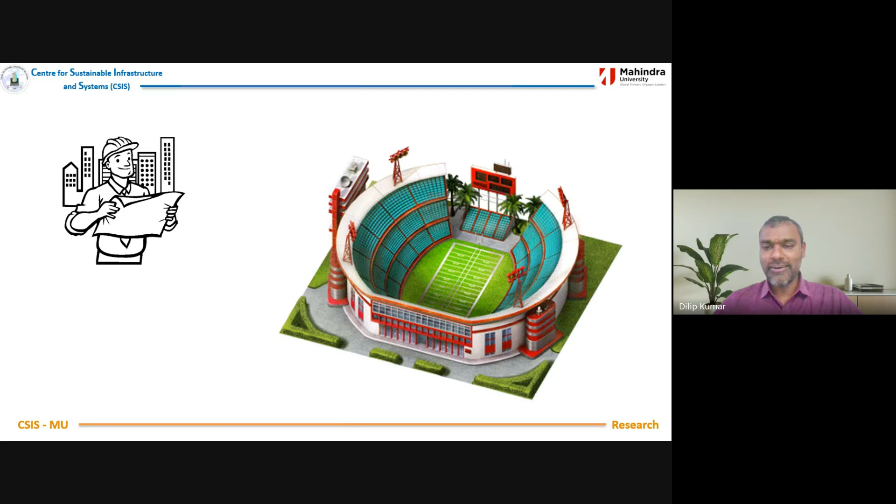As a teacher, I always tell the basic education - what did we learn in civil engineering? We all have dreams to become a great civil engineer, or any engineer, and to be part of iconic or very large structures from foundation to completion of the project in a sustainable way. What we did learn during our education is planning, analysis, design, and construction or execution. This is what we all have learned in engineering colleges in India or abroad, and we've been doing very good. There might be some problems, but yes, this is what we were all taught.

But when we see certain kinds of scenarios like this, how do we answer? Without any basic understanding, how do we address problems like this? How much is it affected or damaged? By what quantity has it been damaged, or what is the amount by which load carrying capacity is reduced? How do we understand such structures is something which was largely missing in the last decade.

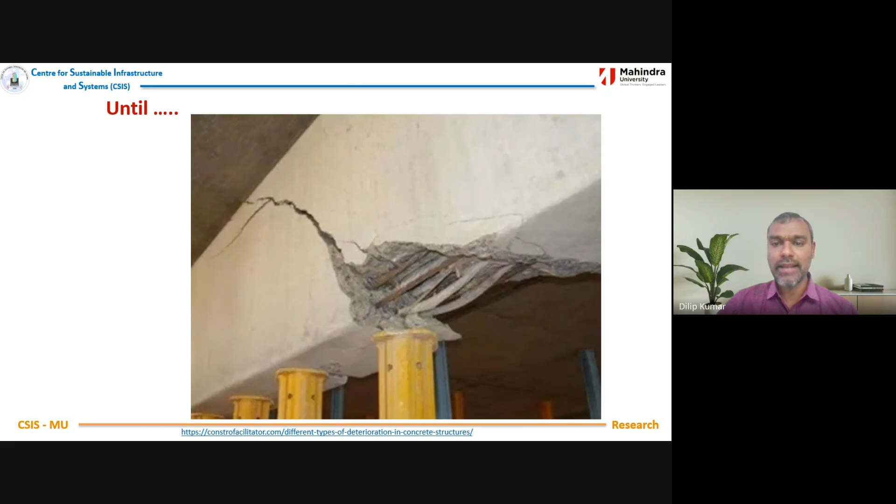So what was missing is trying to be filled by today's education. Civil engineering is not only about building, but also about civilization and maintenance. Currently, as structures are aging, we need doctors. So we have stepped into those shoes where we would like to assess, feel, and understand the structure.

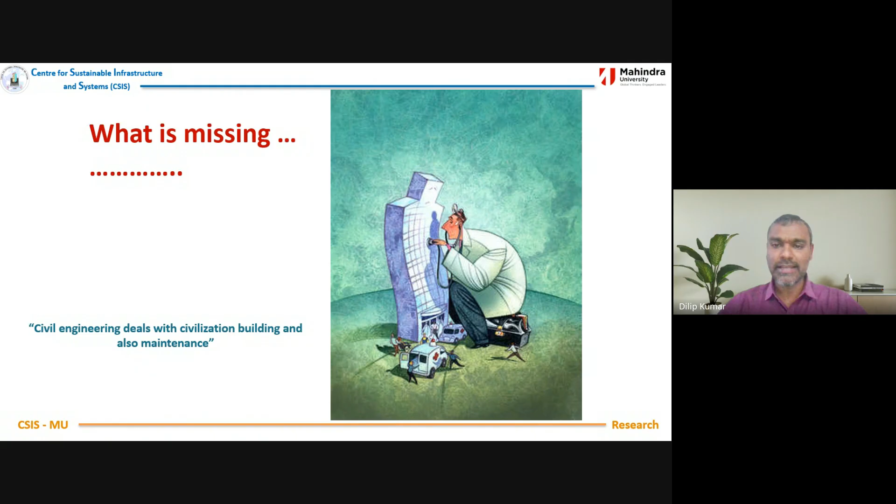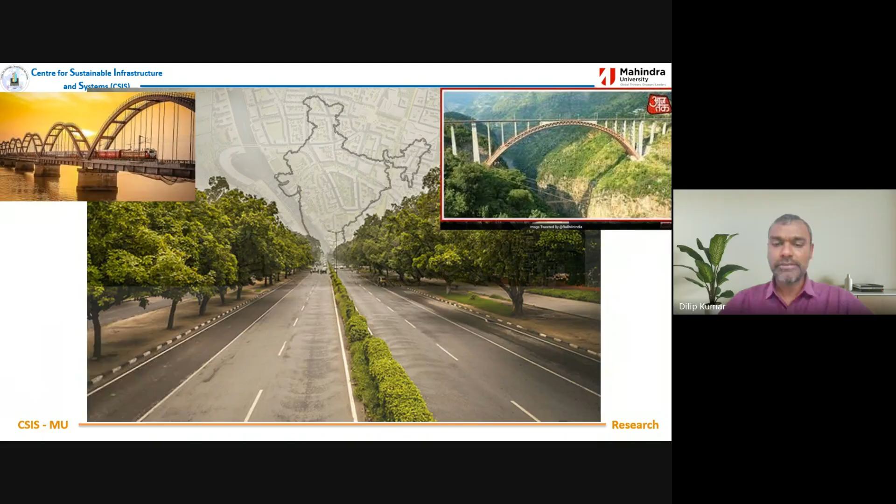The introduction part, as bridges, Indian government has been building a lot of iconic structures, including the recent Chenab bridge as well. And we have very high altitudes, different temperatures, long span bridges. A lot of bridges have been built in India. Not only bridges, but also infrastructure as in buildings as well. Government is trying to invest lakhs of crores on building infrastructure, because that is one of the dimensions to tell a country is developed.

While infrastructure is being built, there are a lot of challenges. One is its aging, and also the condition, and also the quality of construction, how this has been built or constructed over the years. When we come back, this is one of the bridges which collapsed in West Bengal under construction.

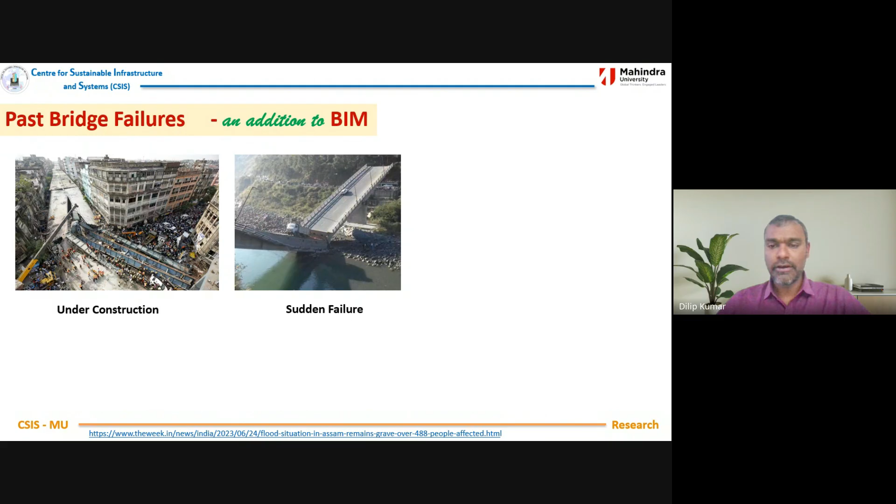It was during construction and it failed, one of the major fatal incidents. The second one is in Himachal Pradesh, where the bridge suddenly failed after 15 years of construction. And third, this is almost 99 years old and was tested by civil engineers, who certified that the current traffic could be allowed. After giving certification, this was washed away by floods, because engineers, when they tested, checked for the live and dead loads, but not for the flood loads.

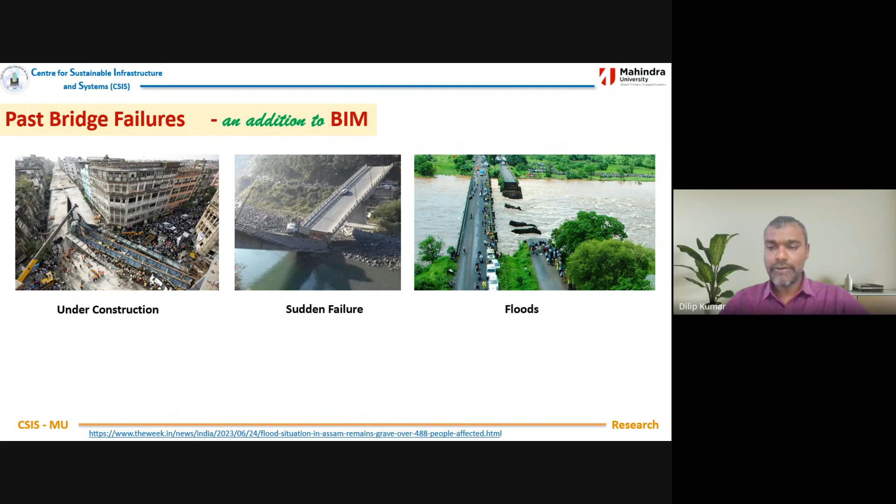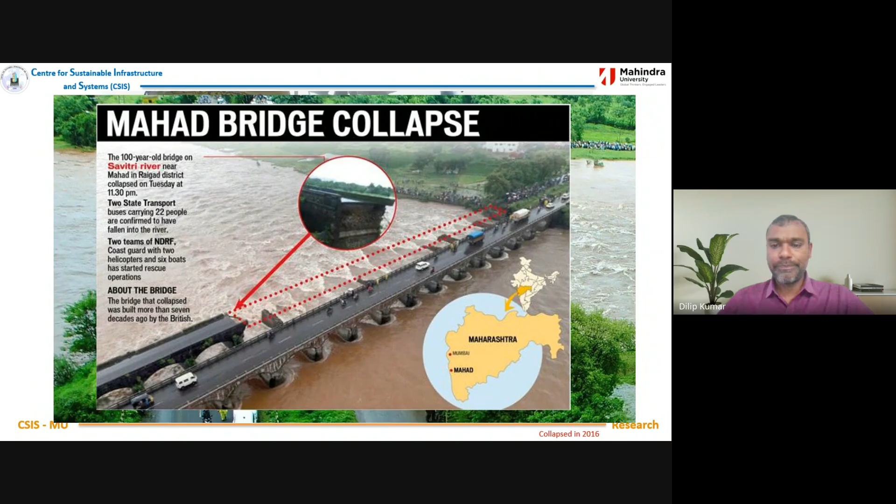Similarly, there are multiple other kinds of accidents happening during construction. And this is Mahad, as I said, lost 30 people during that demolition collapse of the bridge, which was washed away due to flood. And this is in 2023.

This is in 2023 when there was a flood in the eastern part of the country. Almost hundreds of minor culvert bridges have actually washed away. We visited very recently and could still see the effect of washed away roads and bridges still existing in that part of the country. You can actually see the link, and you will find more reasons or more details of the kinds of structures and roads which have got washed away.

So bridges have been one of the most important structures, as they are very costly. In every part, nook and corner of the country, they become vital for any country's travel or even export and import. Now, CRRI, Central Road Research Institute, have taken up a special study to understand the average age of failure of these bridges. From the year 1977 to 2017, they found that 2,130 bridges have failed, and the average age of bridge failure was found to be 34.5 years.

We all know, as designers and engineers, that all bridges are generally designed for 100 years. But then failing at 34 or 35 years means we are losing 65% of its designed age, which was one of the most surprising statistics even for the Indian government.

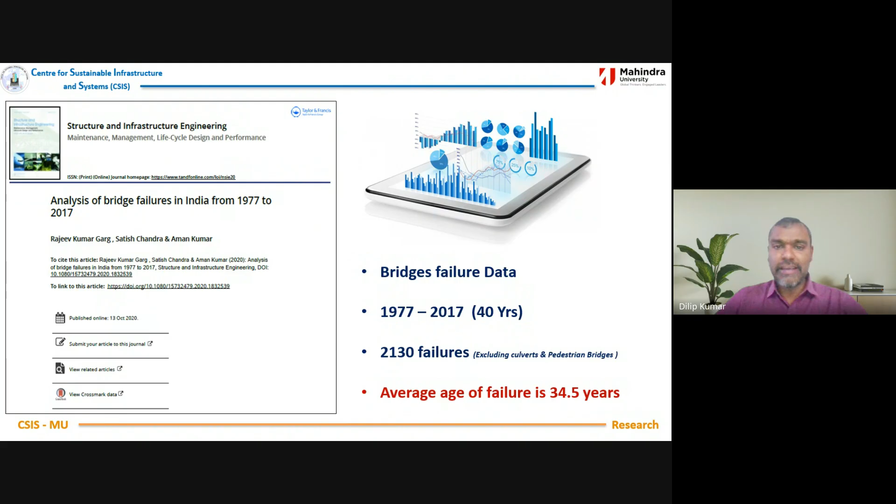So of course, we know bridges cannot last forever, as they are subjected to different kinds of loads, and aging is a natural process, and degradation would happen, either man-made or nature-made. There are a lot of parameters affecting the age of the bridge. But if they are constructed for 100 years, how can we stop any sudden kind of damage, or how do we rank this? It's not only in India.

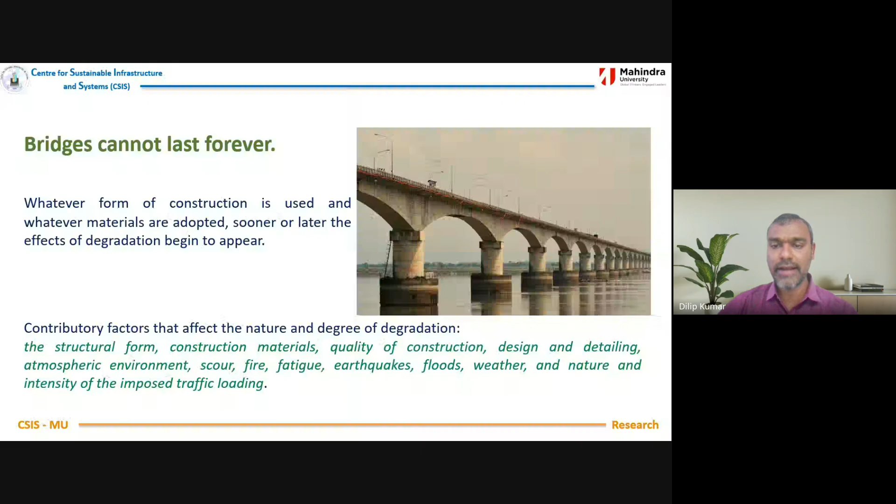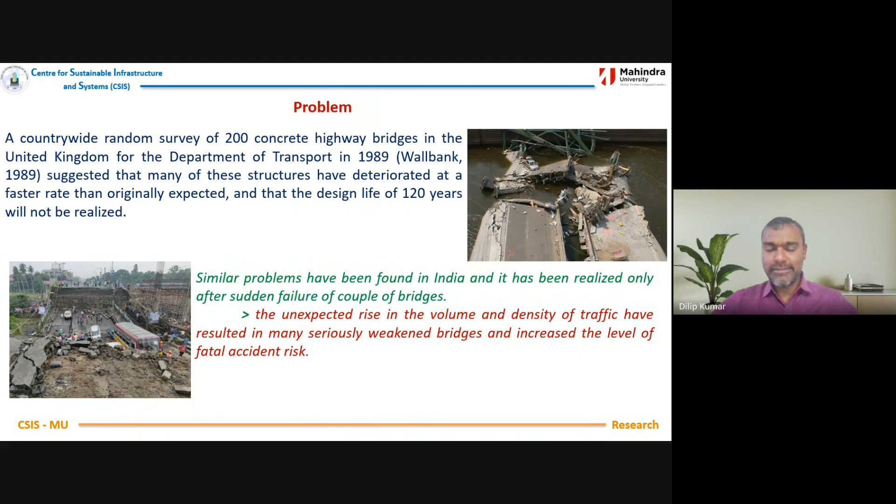UK has also conducted several random surveys on bridges, which are designed for 120 years. Even they have found that their bridges are collapsing much ahead of the design life. It's not only in India and UK, but US, Russia, China, and other countries in Asia and Europe have also found similar kinds of problems. But in India, the average age is found to be very less compared to all other countries. Now, there is one case study which was done in multiple countries. The study was very simple.

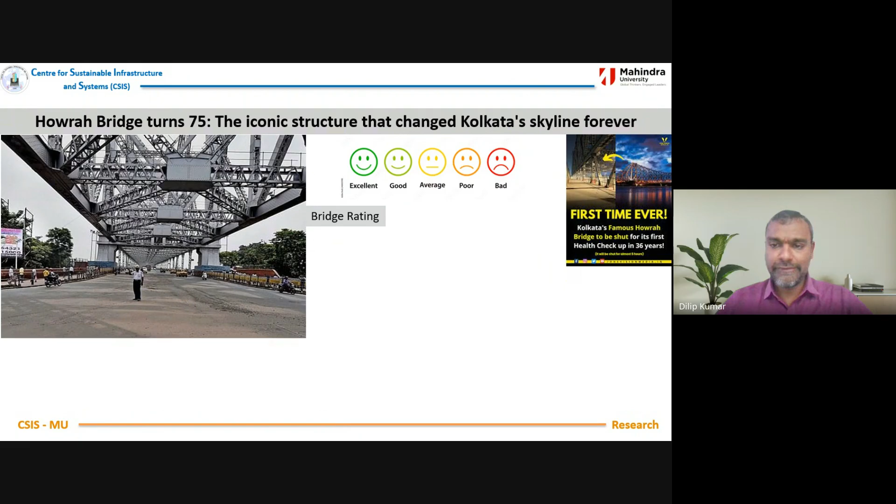A bridge was given to 10 different famous engineers of the country, and they were asked to rate it. All 10 engineers gave different ratings: one said it is good, another said there might be some problem, another said it needs minor repair, and another said there was total fault with the bridge.

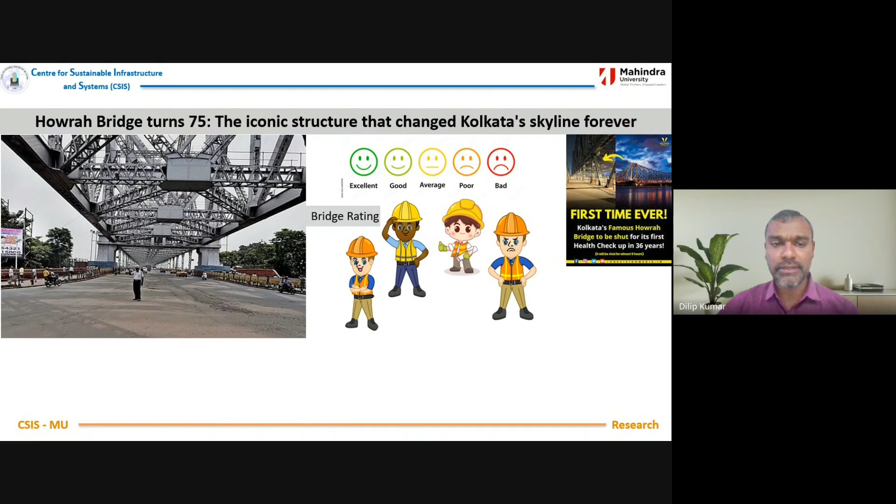So the question, even for the Indian government, was how did it so happen that the same bridge had 10 different readings by different engineers? When inspection is subjective, it depends on the experience of the person, their understanding of bridges and materials. So the same bridge tells different stories to different engineers, resulting in one bridge having a different, non-uniform rating.

So this was also one of our motivations: how can we rate the bridge based on visual inspection, and can we make it uniform? This is one of our first objectives.

As has been known, the Indian government started something called the Indian Bridge Management System, which is about trying to have all the data about all the bridges in India on one platform - regular inspection, assessment, repair, what kind of bridge, what kind of material, what is the span, every detail. It's like giving an Aadhaar card to every bridge in India.

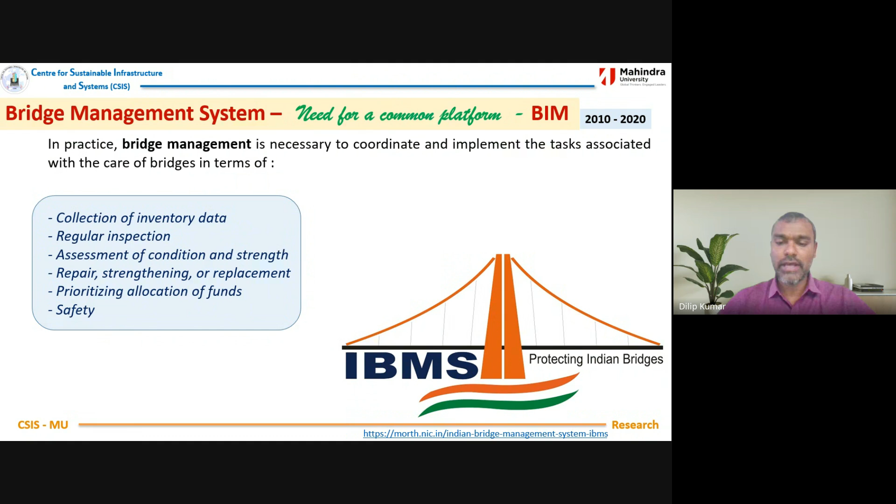This was done between 2010 and 2020, and you can find the statistics on the MORTH or Indian Railways website. Approximately till today, 1.92 lakh bridges have been inventorized, and all this data has been kept in that Indian Bridge Management System.

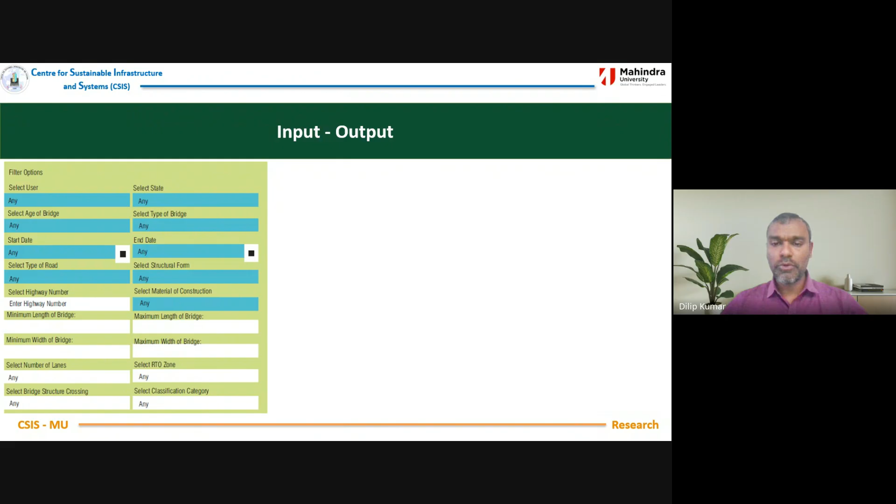But what is the main objective of the Indian Bridge Management System? After having all this data online, they wanted to see the statistics - which bridges have to be repaired immediately, which have to be stopped immediately, and so on. But since the inspection of these bridges took from 2010 to 2020, that's almost a 10-year span, a decade of updating.

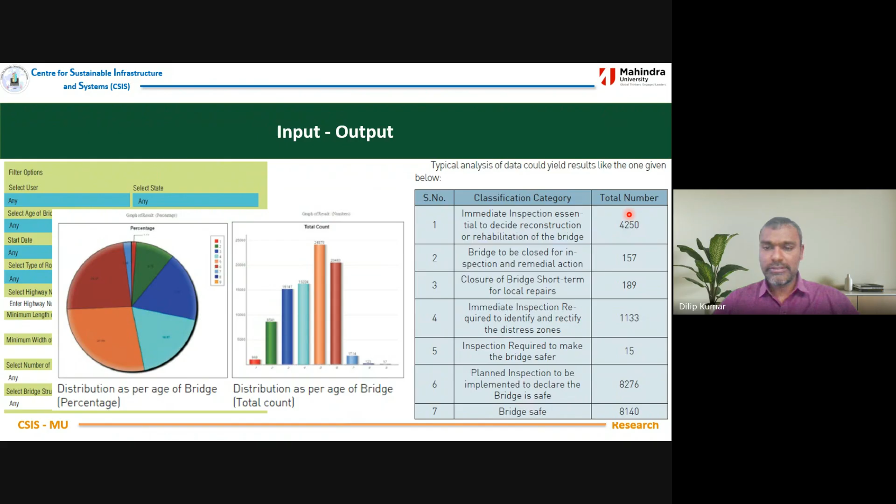Once this was done, you can see all this data about bridges - immediate inspection essential to decide reconstruction, like 4,000 bridges. But this software built on this was not trying to get all the information about all the bridges, as the information updated on this server was not uniform.

The second thing is, how do we update the data automatically? Every 3 or 4 years, having people go into every bridge and update that data would be very challenging. So one of the challenges was data and upload - how do we do that? That was also challenging.

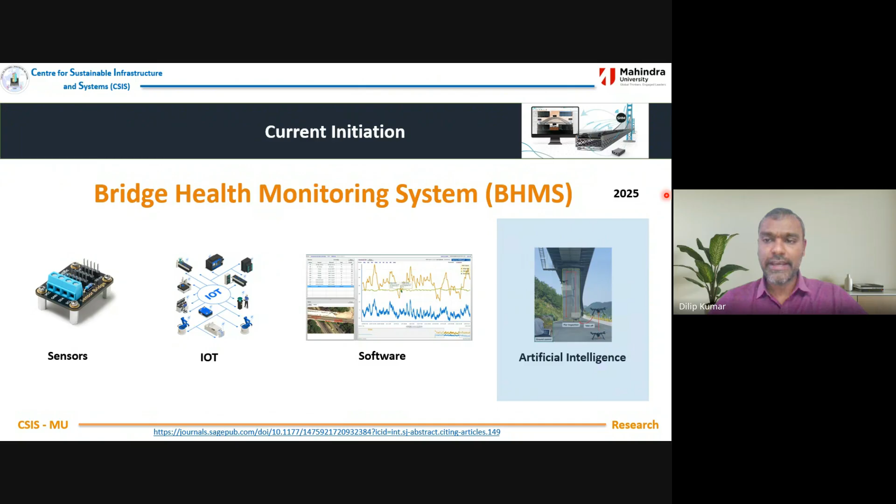Now the Indian government has come up with a new thing called the Bridge Health Monitoring System, BHMS, where they are trying to infuse sensors, IoT, and artificial intelligence. This presentation would like to focus more on AI, especially the assessment of bridges based only on visual inspection, even though we have done a lot of other work based on sensors and IoT, and we've come up with our own code where we analyze even vibration data. But this presentation is limited to implementation of AI.

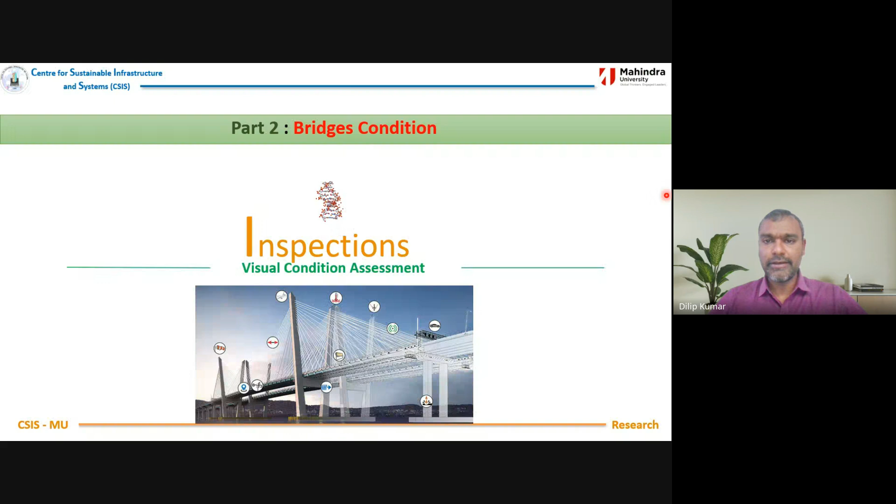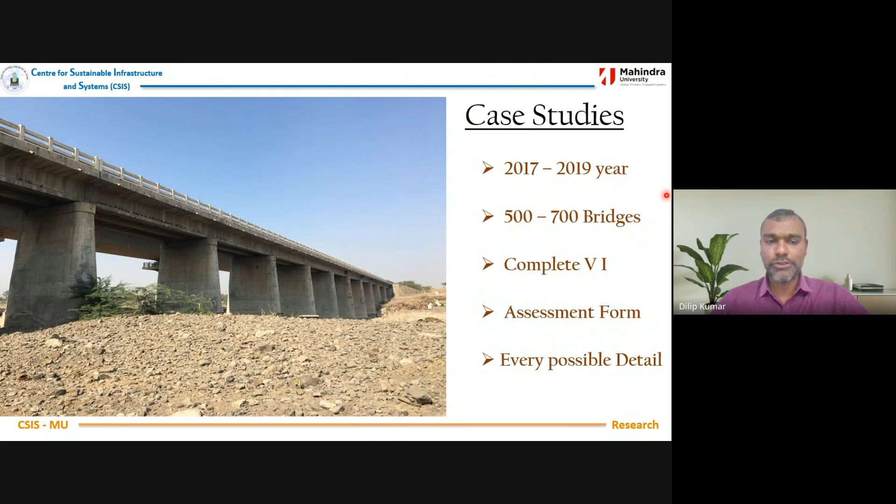These are a few images from sites we visited during our inspections between 2015 and 17. Some of these images were very surprising to us, with more deteriorated bridges than expected. But again, the challenge is how do we rate them? You can see non-structural elements, scouring problems, a lot of spalling and corrosion problems, and masonry and concrete bridges - a lot of different mixed material bridges were also there.

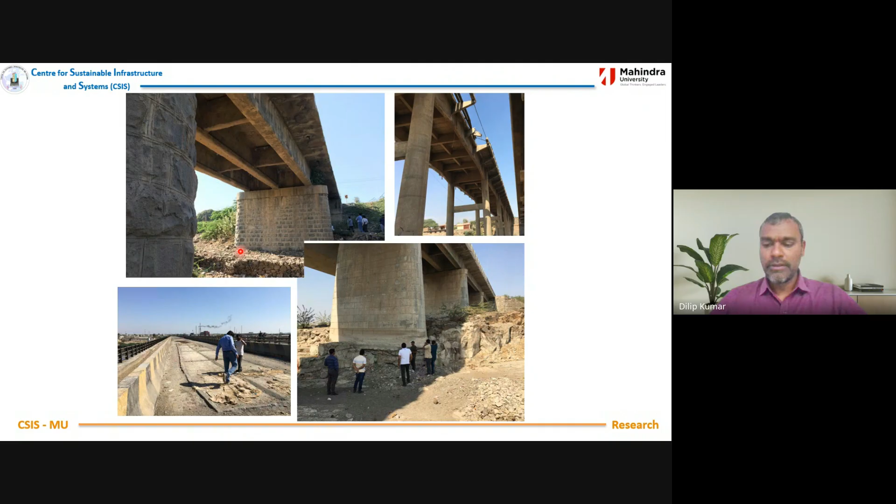And you can see the spalling, and you can see the condition as well. And there were some foundations which were actually built on clay, and they were also sliding on it. Expansion joints were another part of these inspections.

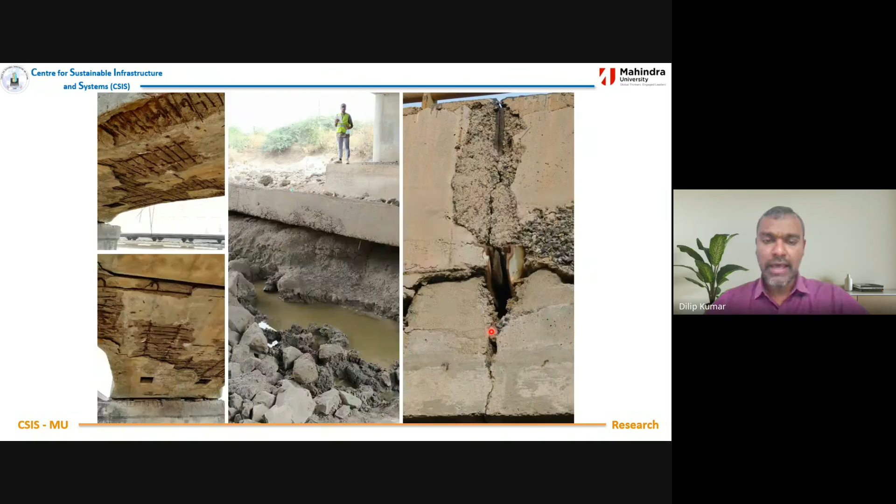But for this, we have to take very good DSLR cameras, zoom in, zoom out, and then sometimes we had to get into the water, mud, everything. We had our own challenges.

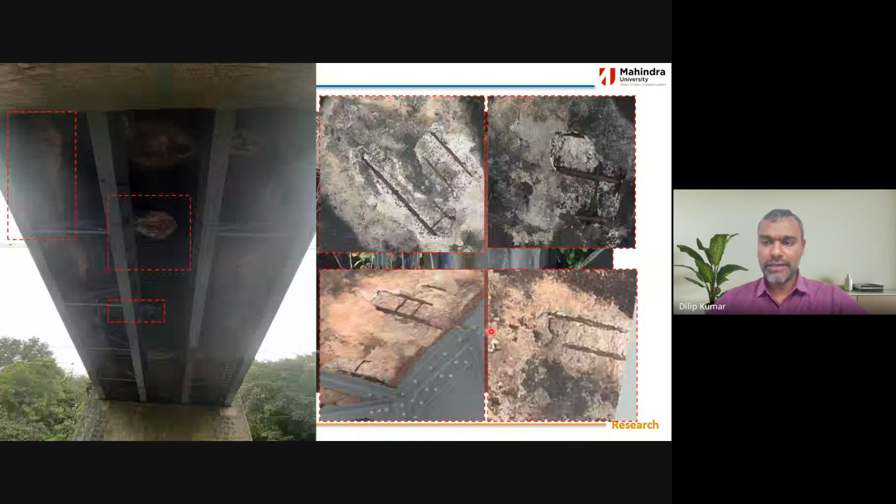And these were other railway bridges, one or two, just for the images to show. And then we had to take ladders, get onto the top and onto the plate girder. We have to take images and see the corrosion. We have to take the hammer and hit the rods, and we've seen it completely corroded on this one.

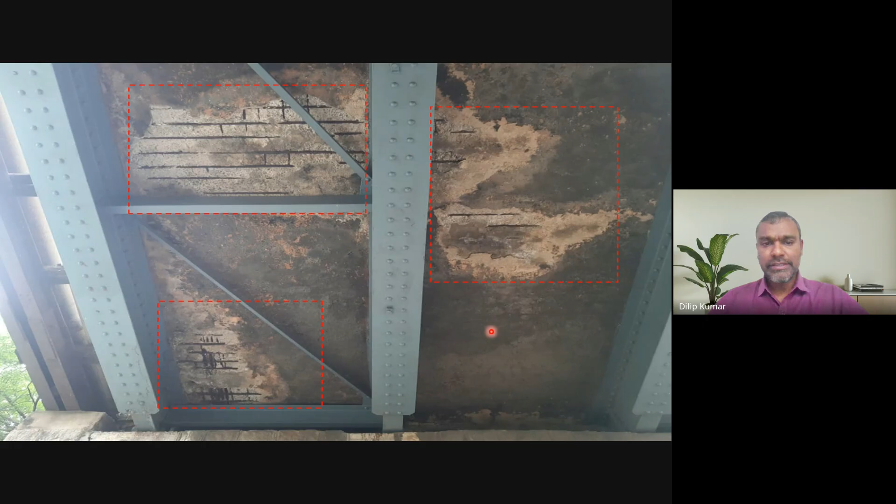And you can see the kind of corrosion, but it was very difficult for us to measure all these damages at such locations. You can see the severity of the damages as well. In this image you can see the high corrosion, and the rods completely became brittle. Here the boundary condition was highly corroded, and it was almost losing its load carrying capacity.

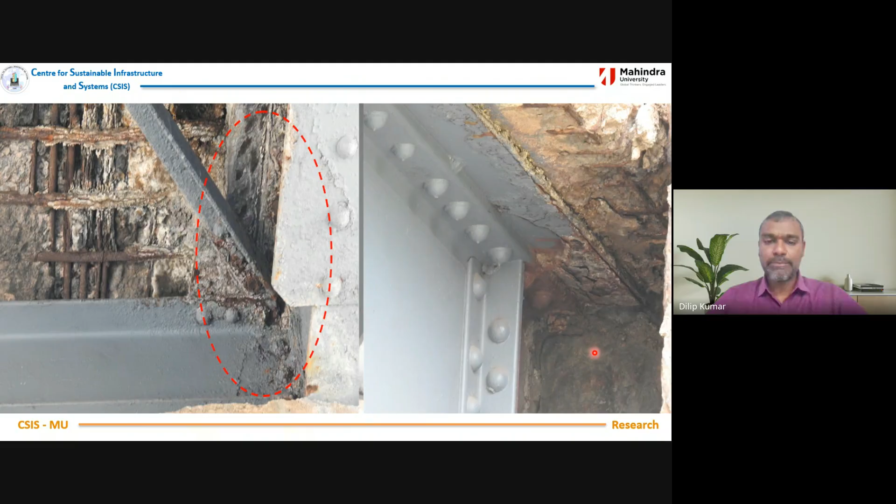Now that's just because of the drain. This is for the drain pipes. Anyway, on the top, that bridge was absolutely very good. Traffic was going at 80, 90, and hundreds, but below the bridge it was completely corroded.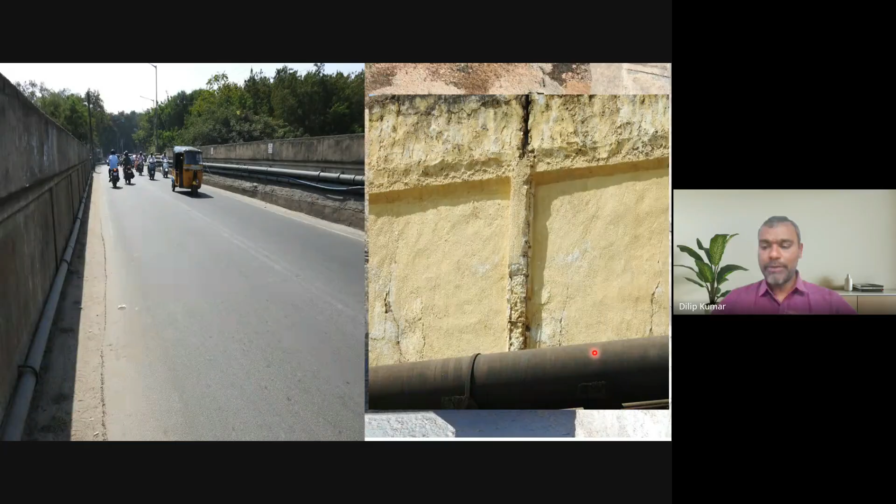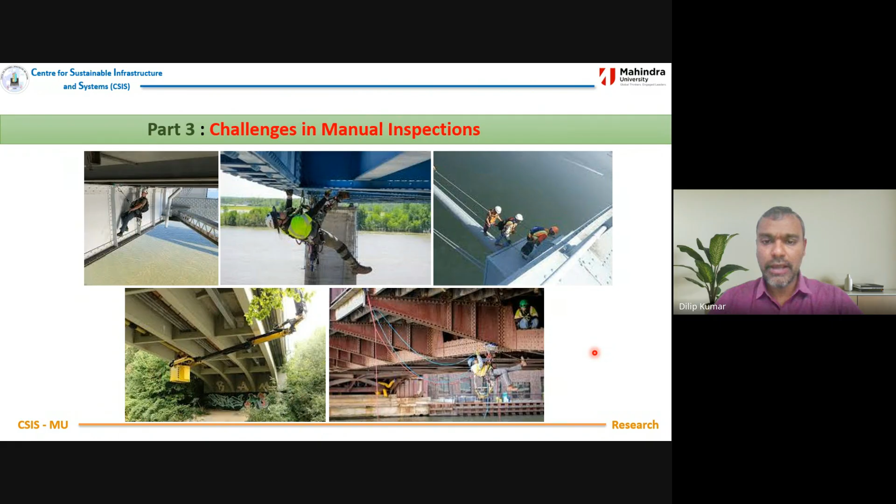It was becoming brittle. Now, apart from all those, we recently did major structures, especially bridges of around 2.4 to 2.5 kilometers. We have road cum rail bridges, and it was very challenging to reach certain locations.

And these are all images I took from the internet, just to tell you that there are a lot of difficulties and challenges. I am not showing all the images, but I'll show you one or two where our team was actually trying to get some geometrical details, and they were trying to have a sensor on a couple of elements of a structure.

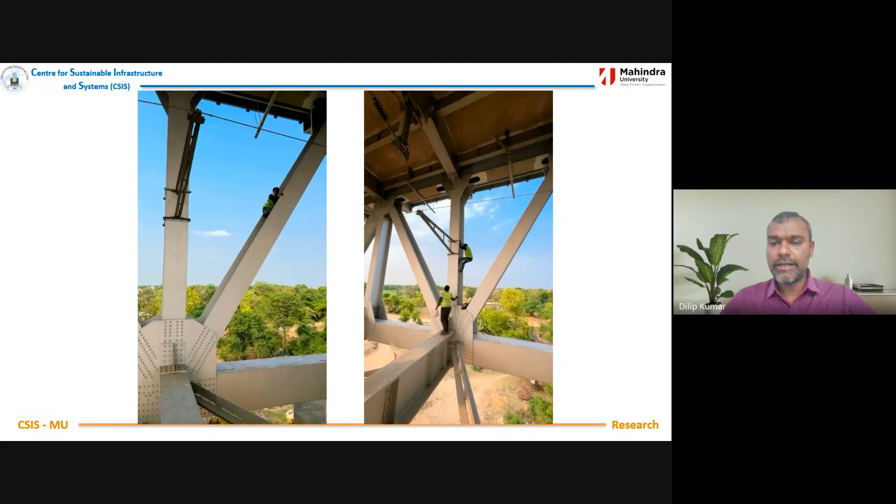And you could see the kind of risk for laser meter or anything to get, especially when we are interested to convert the as-existing bridge to a numerical model or a digital twin. To get all the measurements is always a challenge.

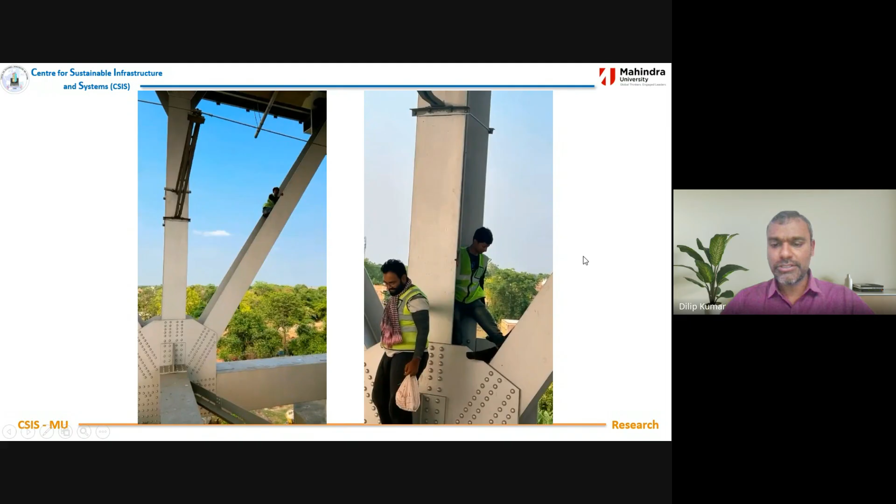So then we started with this limitation. We have known that assessing the bridge is always a challenge. And of course there is always a risk, and this risk is almost there for every bridge. Sometimes we have to stop the traffic, and then sometimes cost is involved. Sometimes there was a lot of flood water and everything.

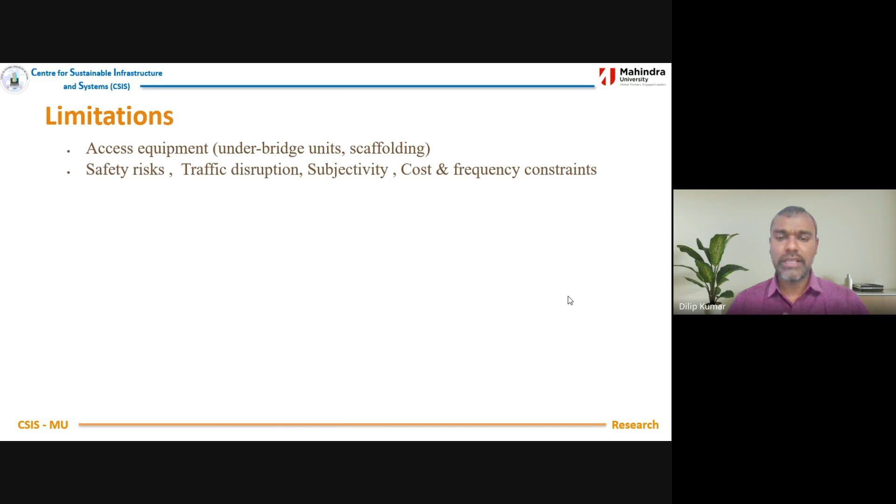With these limitations, we have known that, and all these bridges have also taken a lot of time. So we know that manual inspections are slow, very subjective, risky, and of course they cannot be scalable. Another thing is, within our team, people who assessed different bridges, even the reports we got were also very different. So then we thought, why not start some methodology where we can inspect our bridges frequently, much faster, and it should also be safe for our team.

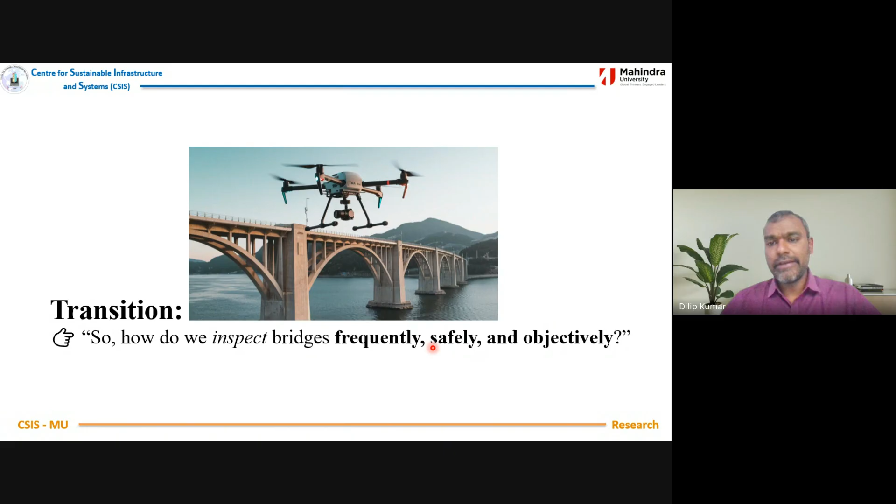Then we started getting into this vision-based analysis. First we started with simple cameras, DSLR, LiDAR, thermal. All this can be used with drones. I have kept unmanned aerial vehicles just because the UAV will just help us to go to the location, but there are different tools like LiDAR, thermal, and DSLR cameras to get the precision or the information we really require.

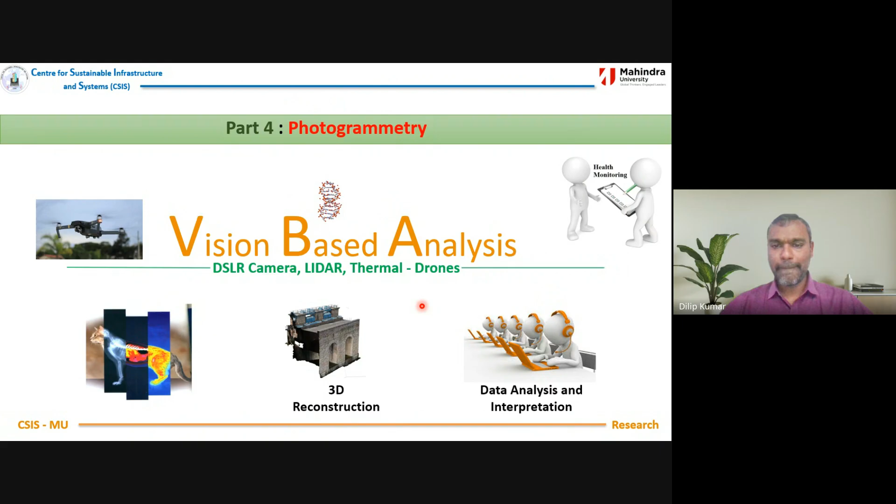So then we started photogrammetry. Photogrammetry is something where you take images of any object from multiple dimensions, and then we stitch them together to make it a 3D model. Generally, if our camera is very good, and then when we make it a 3D detail, the accuracy we found is very good, and it is safe.

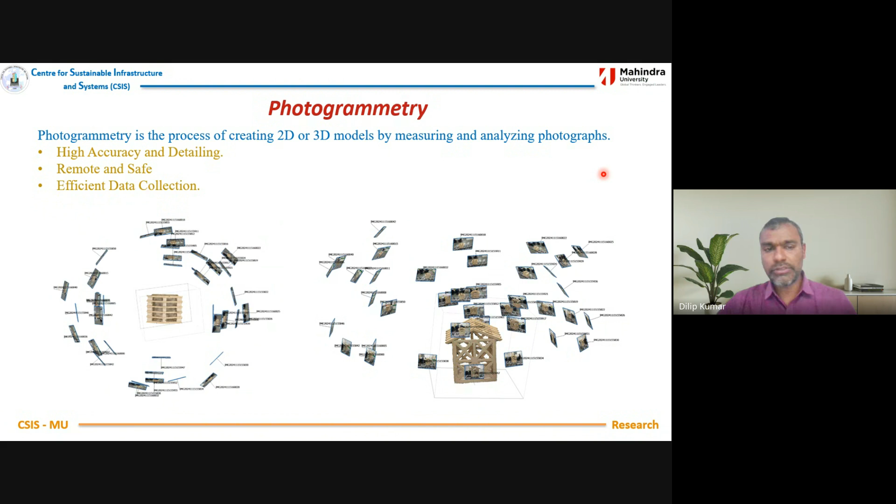And the amount of time for doing such kind of inspection with drones is also almost 70 or 80% much lesser than human manual inspections. And once with manual inspection, if you want to recheck the data, it is always challenging. But with these drones, images, and 3D reconstruction, we can visit the structure again and again when we have this.

So when we started data acquisition for photogrammetry, we started with a simple smartphone, in a small research laboratory. We had a scaled model of an FOB, and we did that with smartphone and DSLR cameras. A DSLR camera, if it is used with a drone, then even a 0.01 mm crack, almost negligible cracks, can also be measured and seen.

RGB depth cameras and thermal images can also be taken to understand various other parameters of the structure.

With UAVs, we can have a manual UAV where you control the drone with a remote and see what the drone sees, or you can give the drone a path to take, or a drone can autonomously inspect by itself. We haven't reached that last stage yet, so we are currently working on automated paths where a drone takes a set path and inspects the bridge to get us all the images.

When we are trying to do photogrammetry to build a 3D model, one of the most important things is to ensure there is no movement near the bridge we are trying to reconstruct.

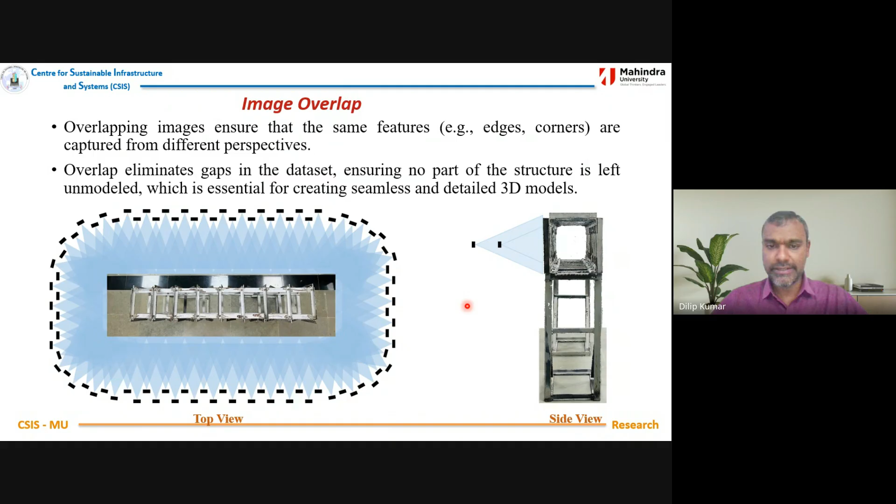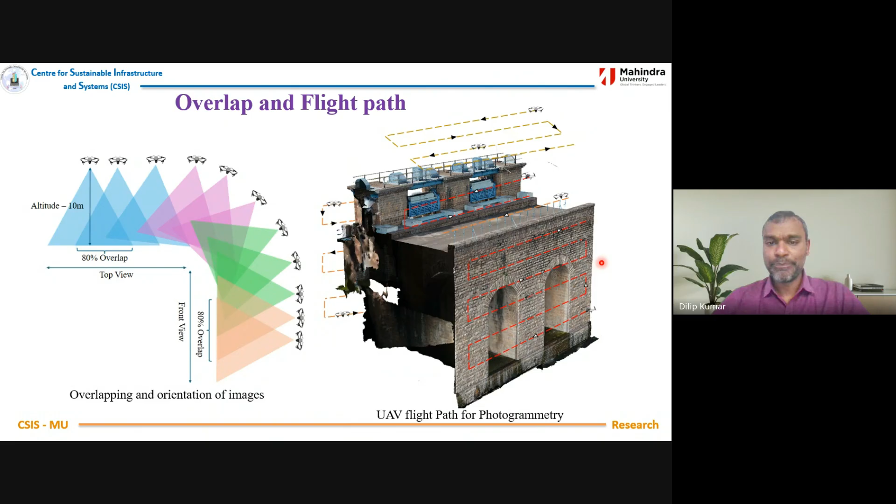Once we started with our model, we thought, why not go and do a real bridge. The important thing is the accuracy of the 3D reconstruction. In our case, around 80% or a little higher overlap has to be there so that every detail we are trying to understand about the bridge is actually used for the 3D reconstruction. The red dotted line you see is the path taken by the UAV, and from that we get the actual 3D reconstructed model.

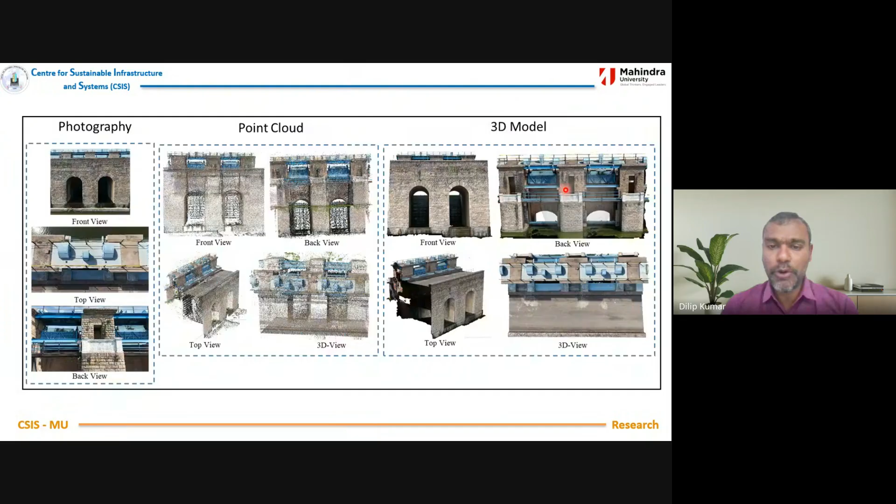This is how it's generally done. If anybody is from computer science, they would know photography is the first part, and second, when we use the software or code, all the images are converted into a point cloud, and then the surface is generated, like what we see here, a 3D model.

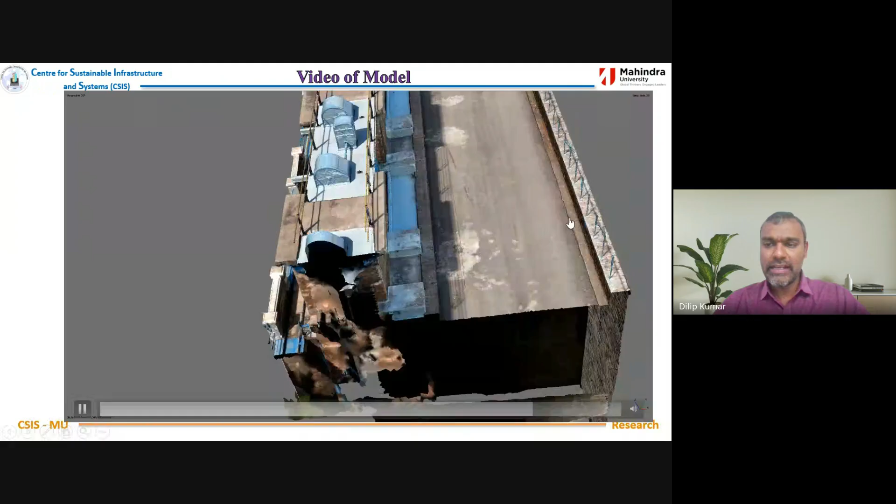This is the model, but you have to understand that from visual inspection we only get the surface, not the internal part of the bridge. These are not solid elements; we only get the textural part. But you are able to get all the pipe details, stone details, tank details, road details, and everything with very high quality.

Once that was done, we thought, why not do a complete bridge. So we took a UAV to a masonry bridge, a concrete bridge, and a steel bridge, and gave it the path, as you could see.

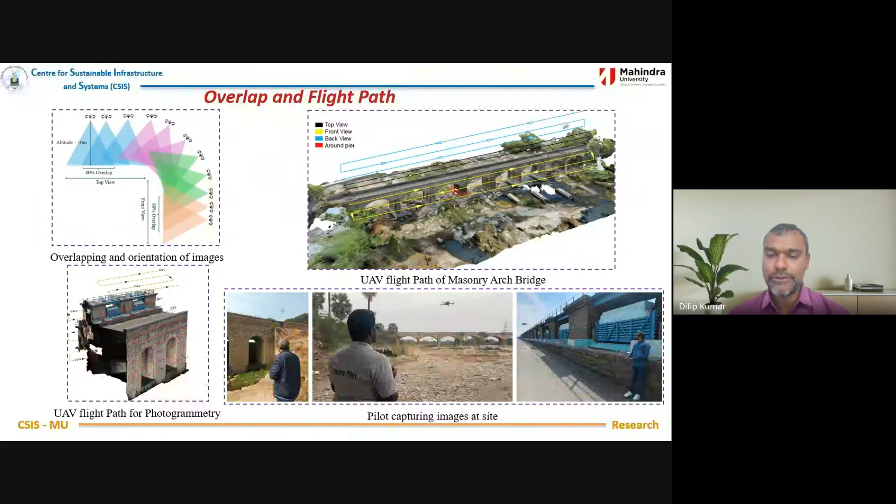There is one more thing here: when a drone is used, you can either take pictures or take video. But when you take video, the drone moves very slowly, I think much less than 1 meter for a few seconds, so that when we extract images from the video, those images are of higher quality. When you convert video into images, it has to be high quality, otherwise constructing a 3D model would be very challenging.

So we use this software or tool, which uses something called SIFT, or Scale Invariant Feature Transform. I won't talk much about this right now, but it uses a simple machine learning algorithm to notice that all similar or exact points are mapped. It also takes care of images from different perspectives, since images might not be taken straight-on from the structure.

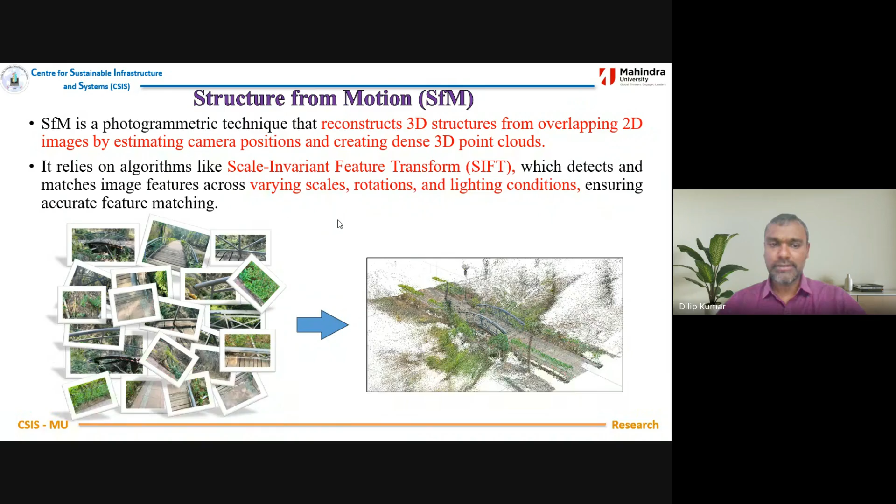Sometimes a drone might not maintain the same distance from the bridge to its place, so sometimes you might have it a little farther or nearer, but yet all these images have to be stitched together without a change in scale when it is constructed in 3D. This is structure from motion or SIFT, and when these are used, all the mapping is maintained.

These are just for your information. So we constructed a masonry arch dam, which we have shown previously. It has got almost 4,159 images, approximately 4,200 images, used to reconstruct this model. But when the model was reconstructed, one thing was sure: even a person can actually count the number of stones in the bridge as well.

Next we did the complete masonry arch bridge, and for this we took around 5,247 images to reconstruct it. Similarly, a steel railway bridge, concrete railway bridge, and composite bridges as well. So we worked with various numbers of images and quality of images, used for 3D reconstruction.

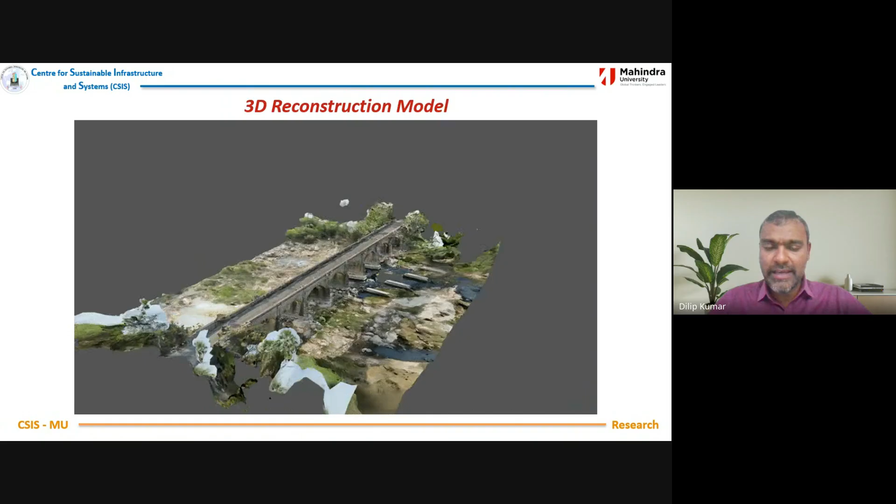Now this is the complete 3D reconstructed model, the complete 3D reconstructed model of the masonry bridge. Once this 3D reconstructed model is there, we were also trying to understand how do we know the damages, or how do we highlight the damages on this. So we get on to the next part of this.

Just before that, I want to add that it sometimes seems easy, but it really requires a good system. This is one of the configuration systems we used, like 64 GB RAM, and we were also using a special NVIDIA GeForce. For that, it actually takes almost 2 to 3 days, but this was after figuring it out through a lot of mistakes, trial and error, a lot of everything. Before that, I think we spent more than 6 to 7 months only to understand, to reach this quality of image.

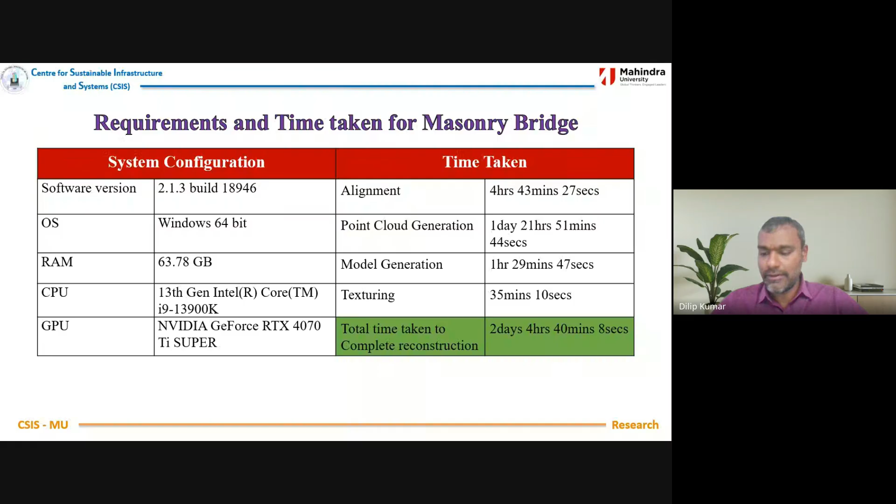And then again, being very fortunate, our team, as I said, Mr. Mustafa and Ahmed, along with the team from KDM, we had an opportunity to visit around 80 masonry bridges in Jhansi, where Indian Railways was trying to do a double lining.

So what we did was, during that inspection, we had to get every detail about the bridge. With the railways, when they wanted to increase the load of the train, or if they wanted to increase the speed of the train, they wanted to make sure that the bridges on which these trains are running are absolutely safe. They didn't want to take any risk.

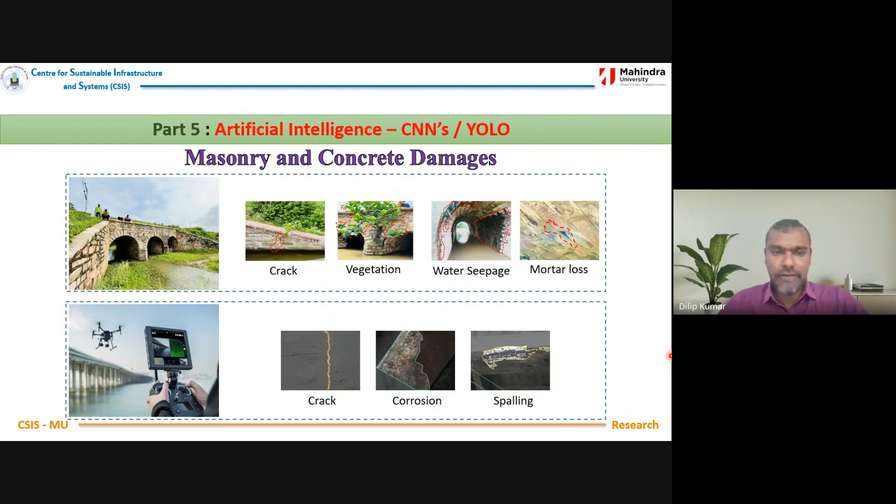So while we were trying to do the assessment of all these bridges, we figured it out. Of course, for this case, we were trying to tell you about a masonry bridge or a concrete bridge, where we tried to figure out all kinds of possible damages which might happen on concrete or masonry bridges. Here you can see different damages like crack, vegetation, seepage, water seepage, and mortar loss. And then, of course, we have cracks in concrete structures - cracks, corrosion, spalling, and a lot of other similar kinds of damages present in the structure.

So then we started using artificial intelligence. As I said, I'm not trying to teach artificial intelligence, but we would like to talk about how we used AI. This is specifically a part of deep learning, where we use convolutional neural networks. We got a dataset of all these images collected from all the 80 bridges and a few more bridges in and around Hyderabad. Then we had to teach the computer what kinds of damages are there.

We had to highlight all the damages, which is also called annotation. And we had to do augmentation, because sometimes images might have been taken early morning, late evening, mid-afternoon, maybe sometimes cloudy, sometimes rainy, or images might have been taken from different angles. That is called augmentation, which means we change the images through flipping, rotation, saturation, so that our CNN model actually understands that this is the same thing.

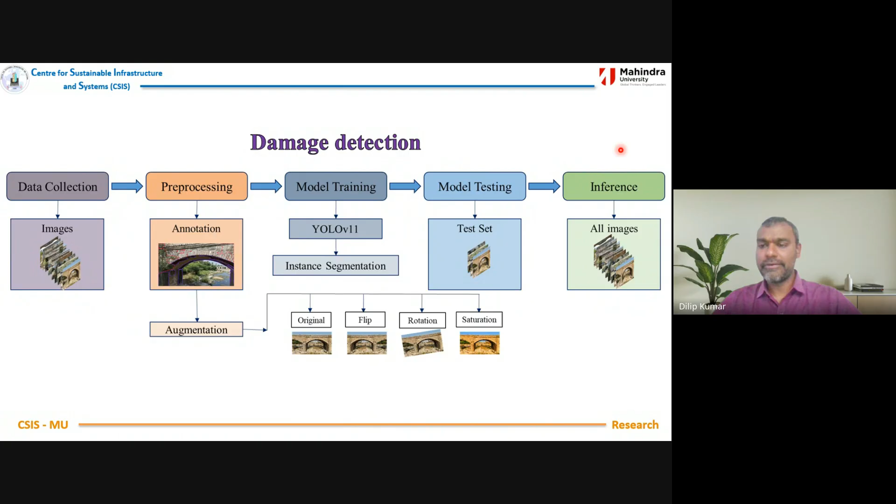And then we used YOLO V11, and we also did classification, and instance segmentation as well. Then we tested the data and got the results as well. So this is the process, and these are the major damages as said previously. Even that was one of the bigger challenges - it was very difficult for us to take all the images of the bridge, especially during rainy season, since not every detail of the bridge can be captured.

After the rainy season, you have lots of trees and bushes, making it very difficult for a human being to go inside. Measuring was challenging, so they had to use laser or sometimes tape to get all the information. But any of these current practices might lead to minor errors, sometimes a greater percentage of error, which might not give us good results when trying to assess the actual bridge. Now, this is the methodology.

The most important thing for any computer model when converting into data-based analysis is the data, and second is the annotation part. So the right part, you see segmentation, then we did annotation, augmentation, model training. This is the most important.

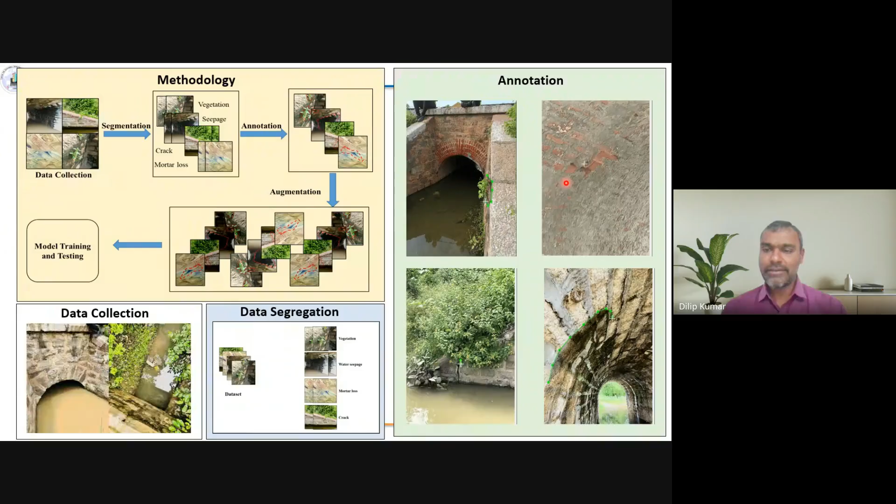How precisely we can draw all the damages and teach the computer is the most important. Improper annotation could lead to errors, so accuracy and precision could go down by a drastic margin. It is very, very important that annotation is done clearly.

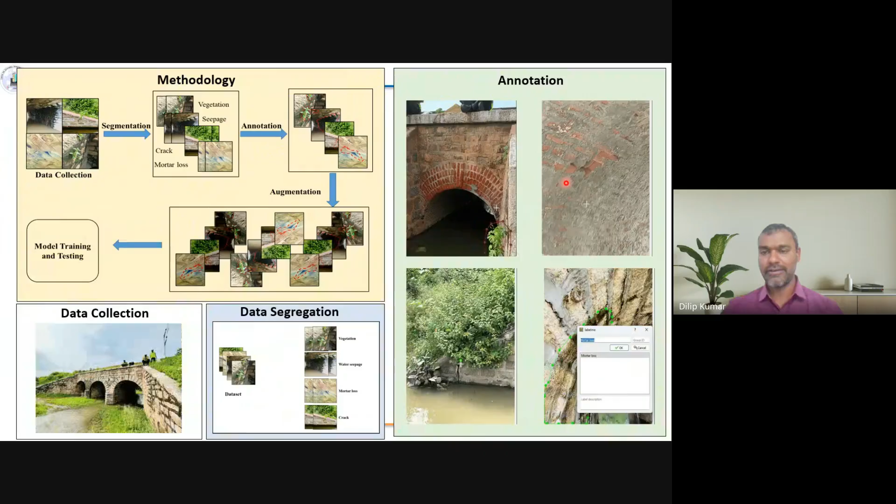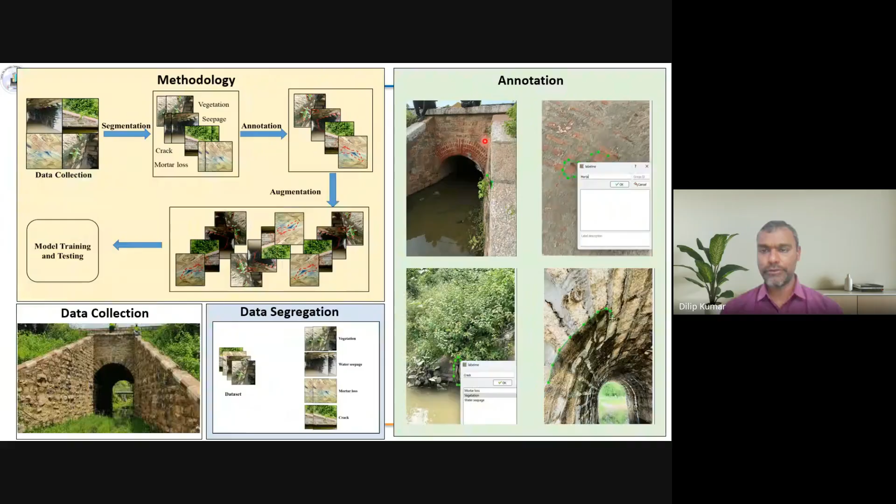Most of the time, our team spent annotating all the images. We worked for masonry, concrete, all the images, on more than 5,000 images, annotating different types of damages. Currently the dataset is more than 8,800 images, which includes concrete, steel, and masonry.

Once that is done, there's augmentation. Augmentation is the same image as before, but either you rotate it, or change the lighting, contrast, and other things.

For concrete, the accuracy is very high. Masonry structures, since they are not as many and data is not that high, the accuracy for masonry comes a little down.

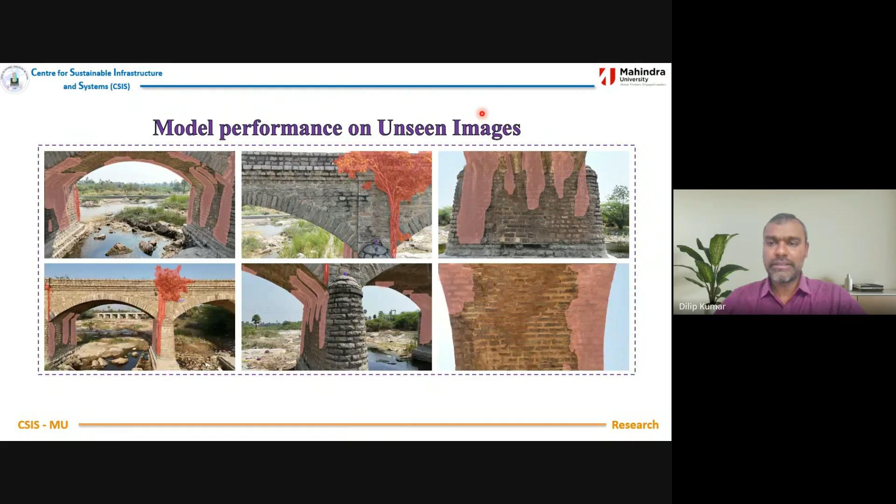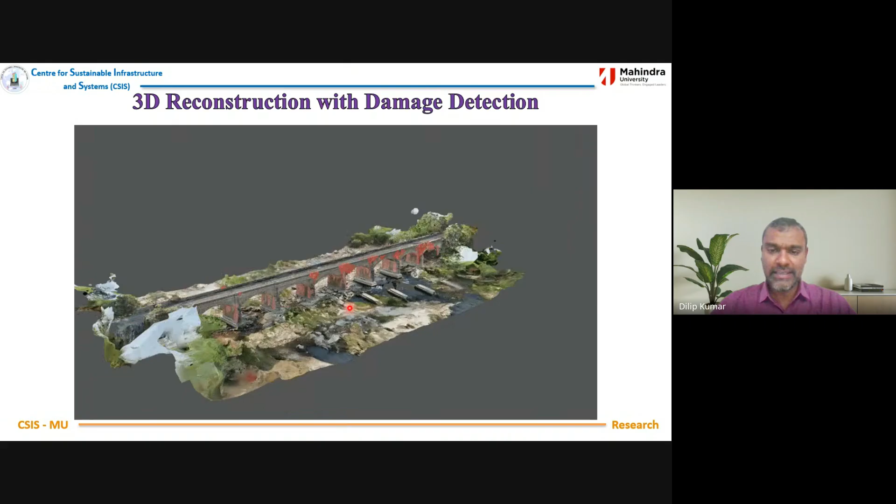Once that is done, all these images were used with the YOLO model, to detect, classify, and do instance segmentation on all the images to understand the damages. Then the images with all kinds of damages were used again for 3D reconstruction. Now this bridge has got all the damages highlighted which are regularly seen on the bridge. This was very important to us.

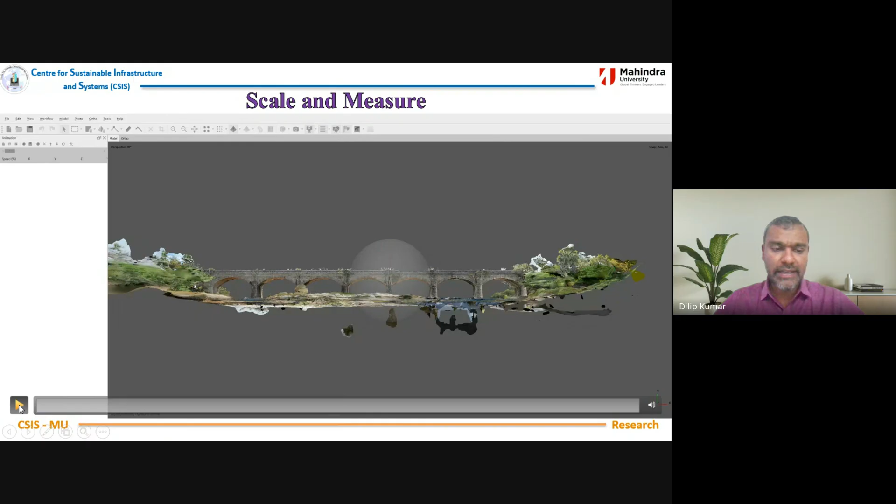Now, when we start rating, how do we rate the bridges? This is also done here. Once that is done, getting the measurements is also very, very high quality.

From the 3D model, if LiDAR is used, we can get every geometrical detail from the 3D reconstruction. Here we can see we are able to measure almost 11.2 meters, and what we measured from the site versus the 3D reconstruction gives almost 99% accuracy. If the LiDAR is very good quality, you can get almost 100% accurate, basically 98 to 100%. LiDAR is that accurate.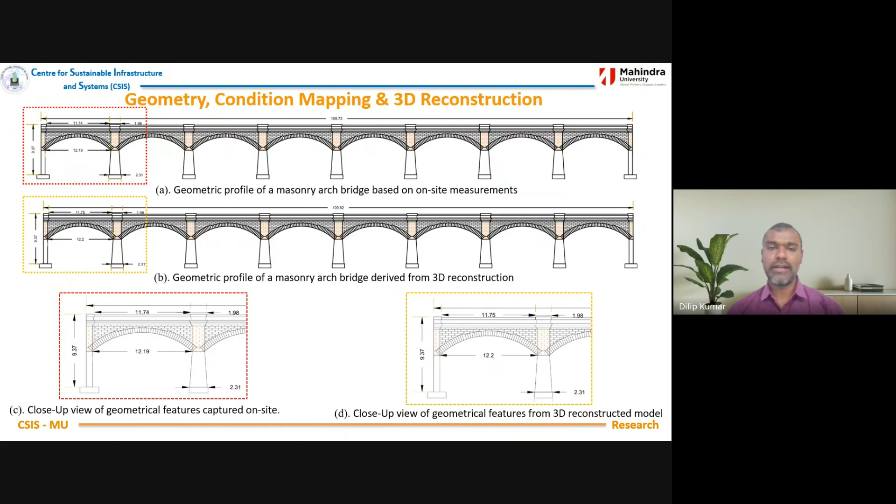The advantage of using UAVs and this 3D reconstruction is it gives us an as-built diagram of the existing bridge. There are a lot of very old bridges where the archive of diagrams and geometries are not available. With this simple methodology, we can also give complete geometrical details about any bridge which might not have prior records. And as I said, accuracy is also very, very high.

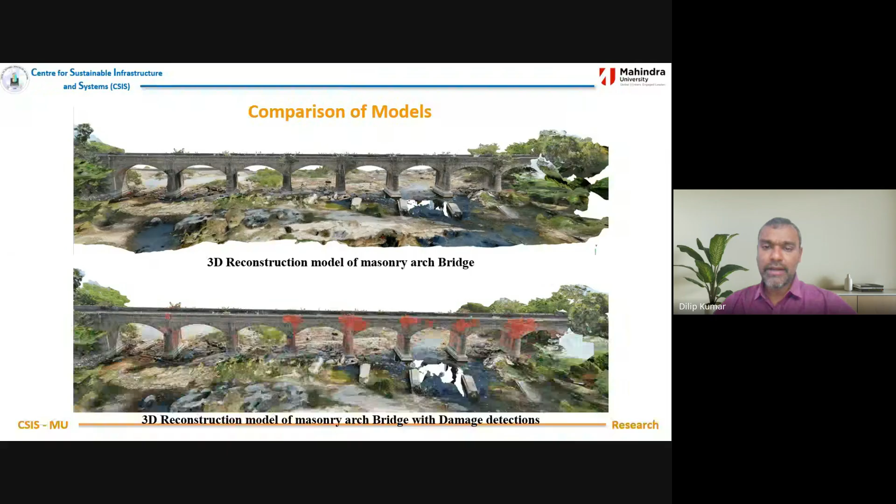Once that is done, we compared the 3D reconstruction models - one without damage and one with the damage. Since we also know the dimensions, we did this for other bridges too. This one has a lesser quality of images, where we were trying to figure out how much detail we can get. We also did this on a concrete railway bridge and a steel railway bridge.

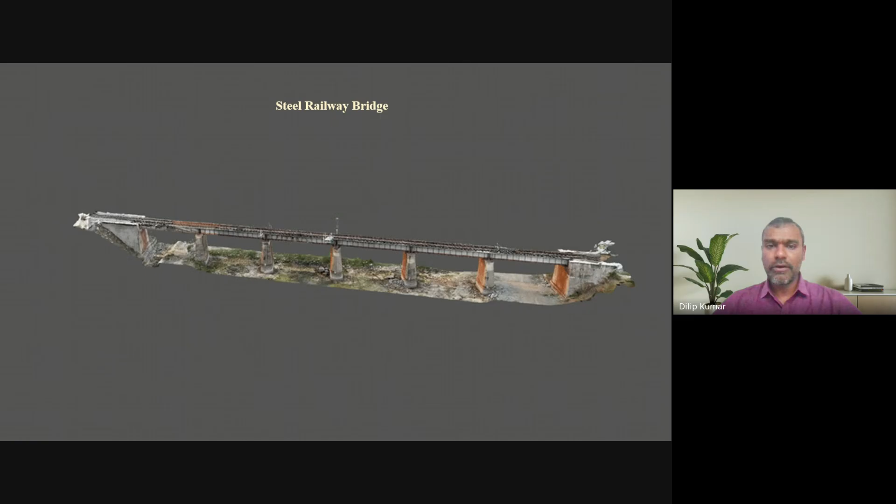We were working on different materials, the number of images, the distance between drone and bridge, and the kind of details which we can get from this 3D reconstruction.

Now, once that is done, the most important thing, as I said from the first slide, is that 10 different engineers have rated the same bridge in 10 different ways based only on visual inspection. With this method, we also did damage quantification.

We give an input image and damage is detected, with instance segmentation, and then you can see area per class—vegetation, water seepage, mortar loss—for different images, because here we have different ways of capturing them.

Now all this can be collated into one 3D reconstruction for one bridge. We can get the total area of vegetation and how many places it is present, the total area of water seepage and its different locations. All this can be accounted for and quantified.

Once you have a 3D model and all the visual damages are quantified, the rating of the bridge could become uniform if this methodology is used.

For any person doing visual inspection, quantifying damage is very challenging. We can tell that damage is there, but what is the quantification of damage is very difficult to tell by human perception, even with experience—sometimes it's very difficult.

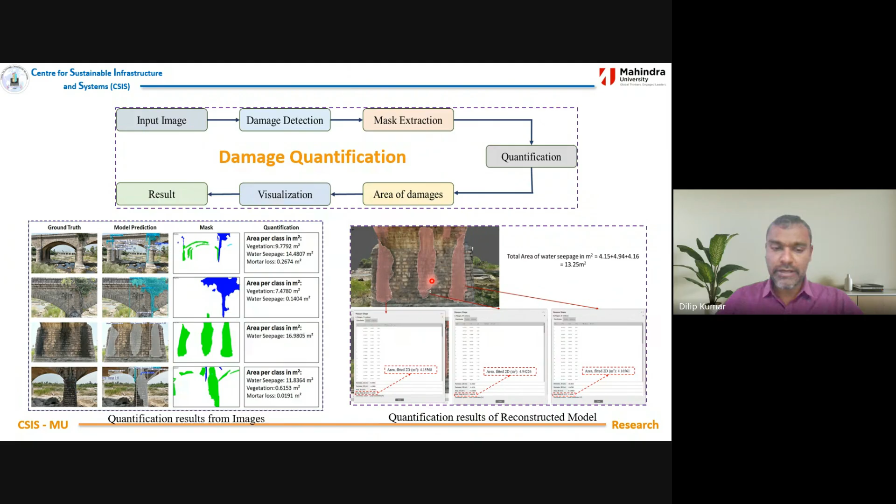So our first objective when we started was a uniform rating, and now we are at a stage where we can rate bridges uniformly.

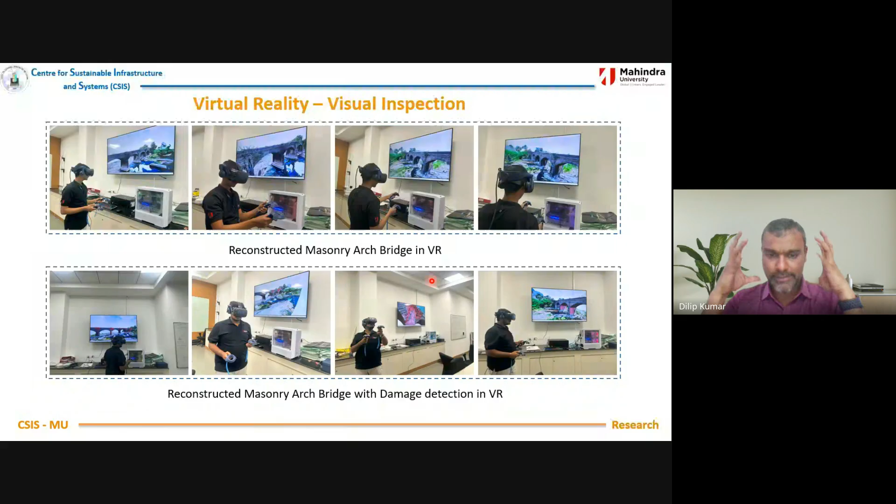Not only that, suppose someone wants to see the bridge or do the inspection while sitting at the office—we have also built virtual reality, using HoloLens, where a person can feel as if they are at the bridge.

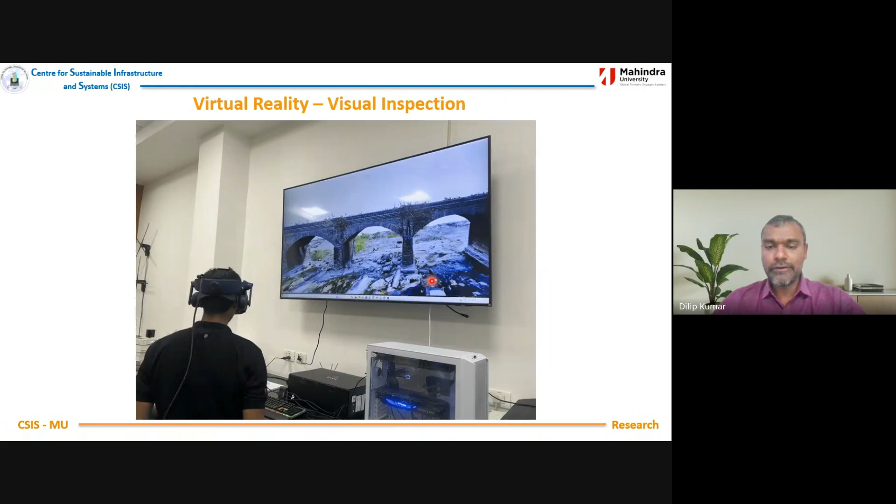They can walk around the bridge, zoom in and zoom out, and see everything. So when a report is submitted to an Indian official or client, they can look at the report and damages, and also open the 3D model in their office to validate whether everything has actually been recorded.

So that is also done—we built virtual reality so you can do the inspection from where you sit, or we bring the bridge to your location and you can inspect it there.

This has also been done in our research center, where we were trying to look at one of the bridges which we reconstructed in 3D.

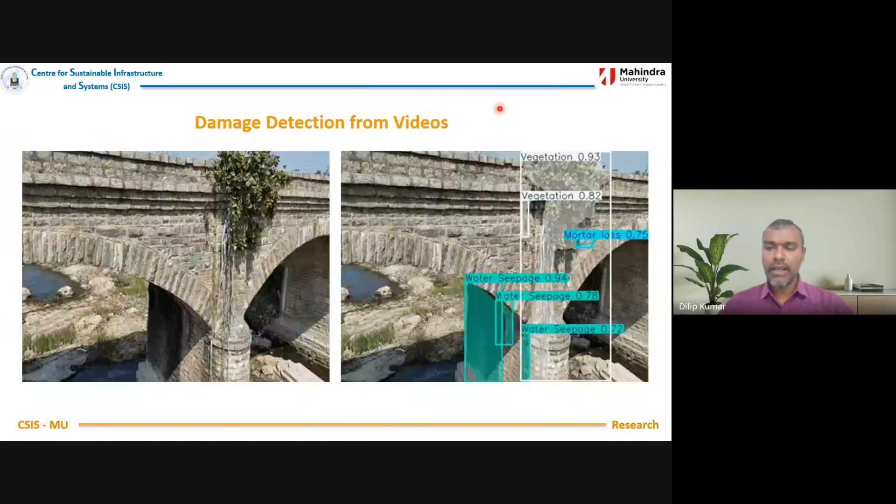Not only that, suppose we have a live video that is processed—it can also show you results in real time. These things have become fairly common now. You can see mortar loss, vegetation, water seepage, and it also gives its confidence level.

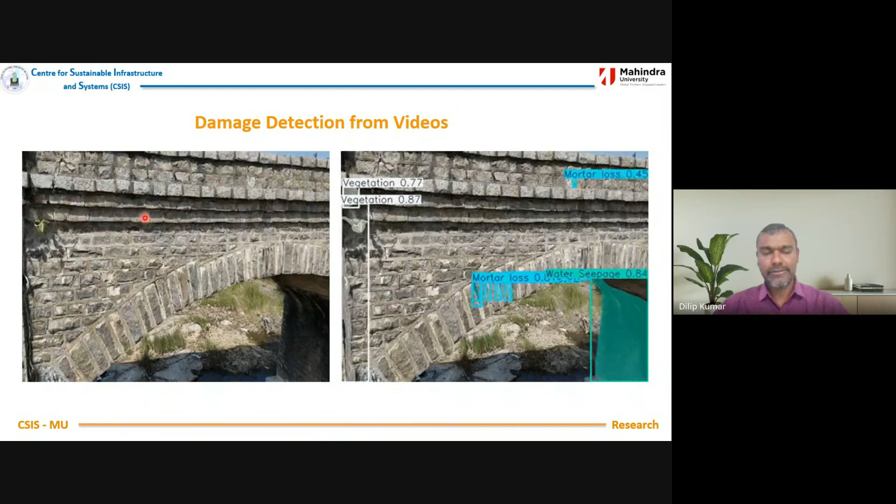On the left side is the real video, and on the right is the processed video, which is highlighting the damages.

Similarly, in the other video, this is the drone shot—the drone was going very slowly, and this is the actual video. You can see the pace of the drone as the video is being taken, and the right side video is processed, showing different types of damages in different colors, with different confidence levels.

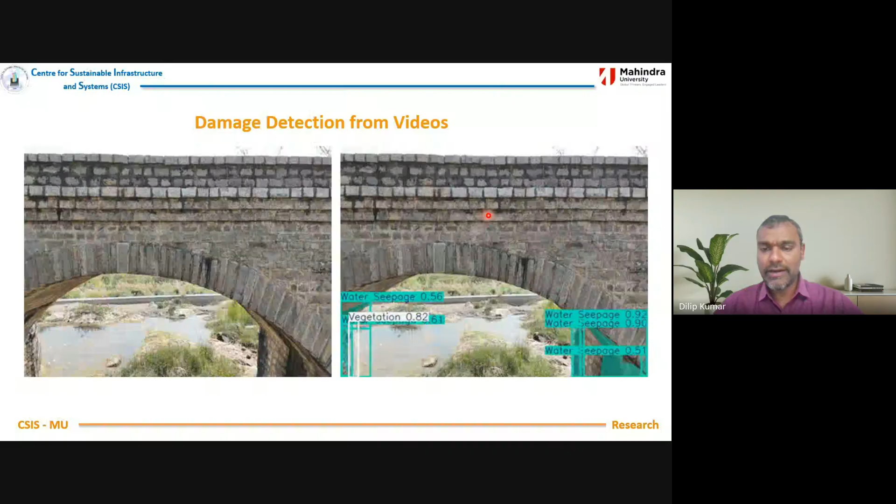From all this, we were able to automatically do the complete 3D reconstruction of the bridge, and by using YOLO, we were also able to classify the damage. We know the location of the damage, we have instance segmentation of the damage, we were able to quantify it, and we also know the different types of damage on the bridge.

So in short, I didn't want to get too technical, but we are very happy with these results.

So what we did was we were trying to assess a bridge, and then we wanted to give a uniform rating to the bridges. So that is what we have achieved right now in this.

The key message of this presentation is that before inspection had a lot of challenges. A person was not able to travel to the bridges always. There had to be seasonal visits, and sometimes it was very challenging for engineers to go to the bridge.

So now inspection has become data driven, and these drone inspections are repeatable and scalable too. The most important thing is the accuracy of damage classification, identification and quantification largely depends on how we train our model, and it all depends on the quality of data we get.

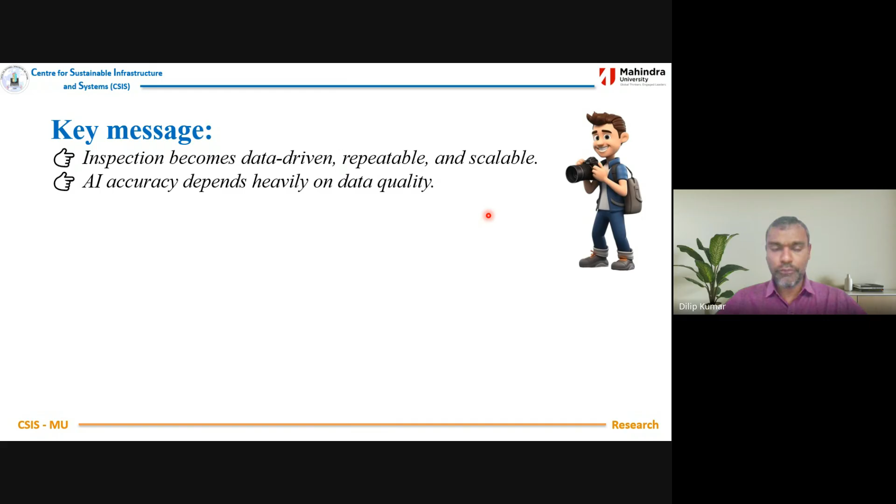So this is what we have transformed into. We have transformed ourselves into a data-driven assessment, and by using AI, we have also tried to make ourselves more automated in assessment of bridges.

The final takeaway from this presentation is that you all have to understand that unmanned aerial vehicles and AI are not the replacement of engineers, for sure. They are just empowering them.

Like if I am speaking on a mic, the mic will only make my voice audible to hundreds of people. If I talk in a normal tone, only a few people can understand. So technology can always enhance human capability or capacity. In the same way, UAVs and AI will empower the quality of inspection we are trying to do, first, and second, it will also help us in rating the bridges uniformly.

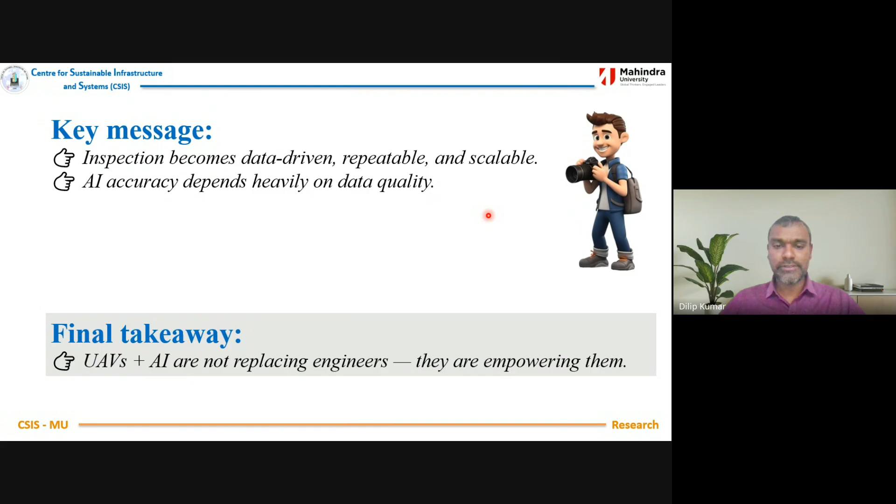This is what we have from this research which we've been doing for the last 2 years, especially on UAVs and AI, in our research center. We wanted to see how stable drones are, how much they can bear, and all that.

So I have also requested Mr. Mustafa and Revan Sagar to be part of this presentation. Even though I have presented, both of them have spent enormous amounts of time at various bridges, had to travel early morning at 3 or 4 o'clock, sometimes stay and take images all day, early morning to late evening. They visited different bridges, including all the Jhansi bridges with the help of KDM engineers, taking most of the images of all these masonry bridges. So special thanks to them for being part of this.

I have also requested them to talk for a minute just after my presentation so they could share the kind of challenges they had at the site. Sometimes it's easy to show images and stand like this with these drones, but sometimes these drones can be very challenging at the sites.

So this is the study which we did, and what we are trying to do is make our bridges talk, with sensors and with our drones.

So maybe next time we'll also talk more about LLMs, where we have reached a stage where we are keeping sensors on the bridge, and if anything happens on the bridge, there is a voice-based understanding so the bridge can talk to us. We're working on that, and most probably for the next presentation or seminar, we'll be happy to provide that in another 3 or 4 months.

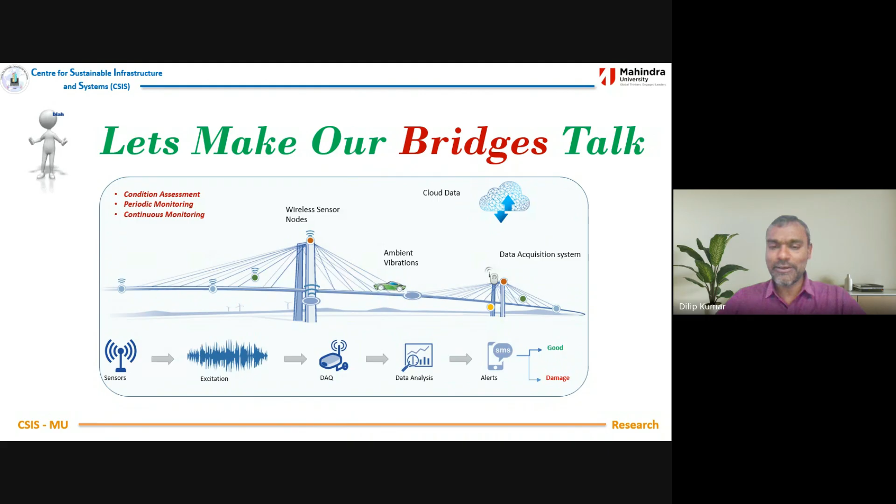So just before I end, it was a very small presentation, I know, but I didn't want to make it too technical. I just wanted to show how things are being worked out and made easier for engineers, for a very quality assessment of bridges.